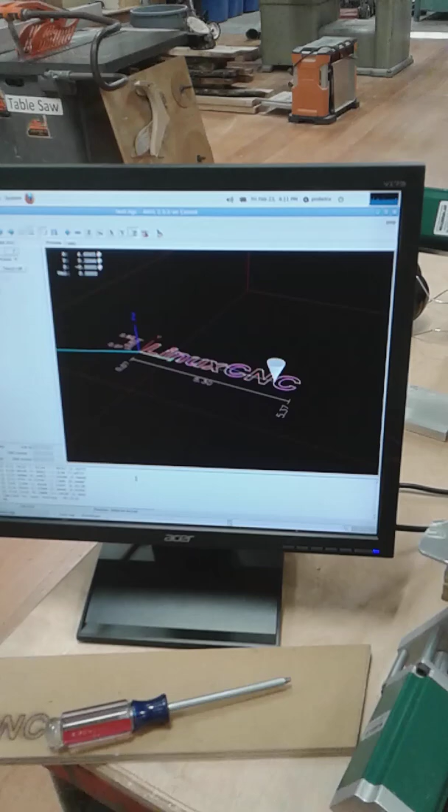Okay, here we go. It's another mad day in the DSS wood shop.

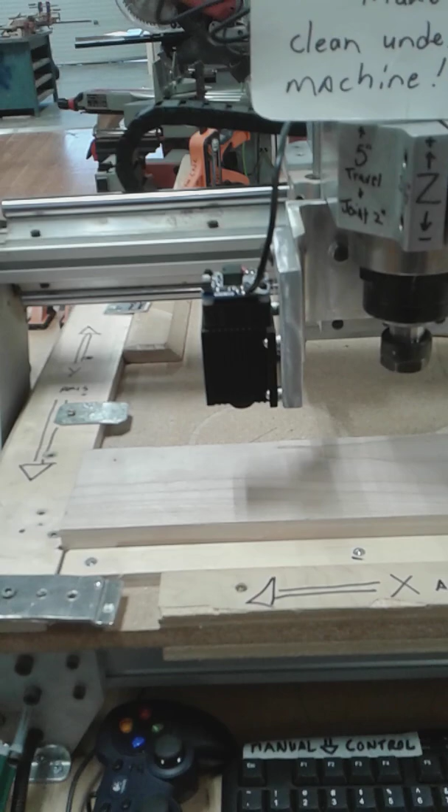We're working on our CNC router, and we bought this laser head a while back for doing some laser engraving, and I'm finally just getting around to setting it all up because we have to write some custom G-code for our post processor, since it's plugged into where the spindle goes, back there. So the spindle will shut on and off to turn the laser on and off while it's traveling between what it's engraving.

So let me just really quick, there it is, and there's our test file, and this is a Linux CNC test file that the machine came with.

I've done a bunch of manual editing of the code, and it may not be totally clear, but M3 is to start the spindle. We had to have a pause, a G04, a half-second pause for the laser, and then M5 just shuts it off. So I went through this file and manually edited that code, and then spat it into the program.

And set my zeros, and it's actually working really well. So I've got a test piece, I got the laser, and there's a piece I just ran, so I'm going to run that right now.

I've got my special 140 to 600 nm glasses on to filter out the laser light that's bouncing off the wood. And we got this clamped down just so the wood doesn't move with vibrating the table. And here we go. There's the play button, and let's see what happens.

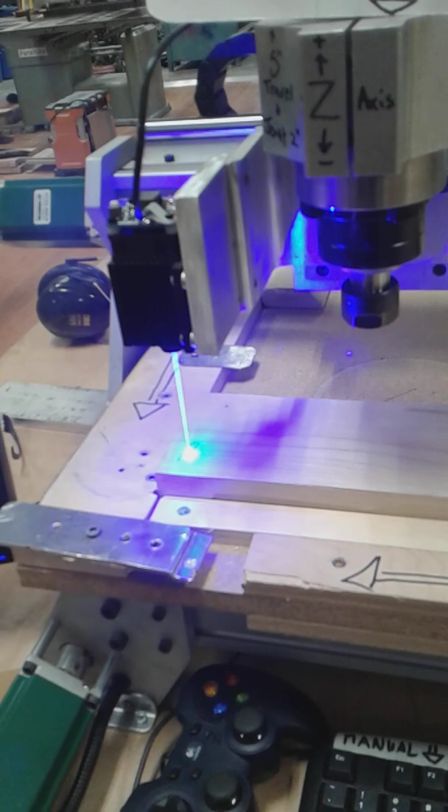Fascinating to me that the video is actually picking up the raw laser light, but again, the glasses that I have on are filtering that out, so all I can see is what's actually occurring on the wood. And there's the program kind of bouncing through the G-code.

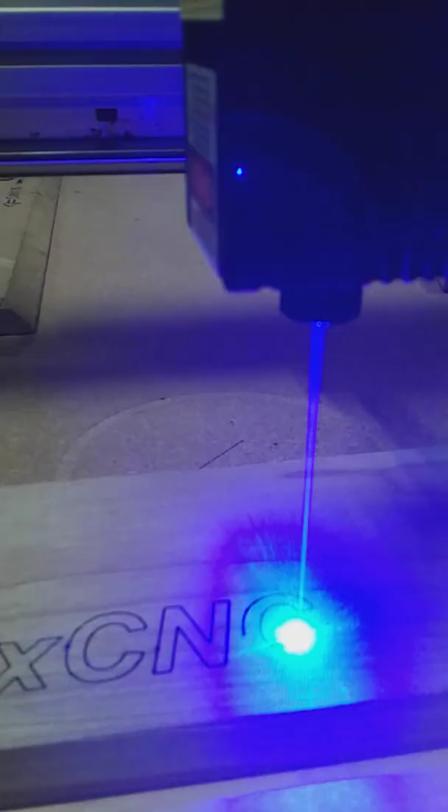And there we go. So it burned the Linux CNC logo into the wood, and it did a really nice job. And actually, if we zoom in, let's see here, can we zoom in right on one of the letters? Oh, that's a little too close.

But there actually is a depth. It actually goes down, we were using pine, it was going down about almost a 1/60th of an inch.

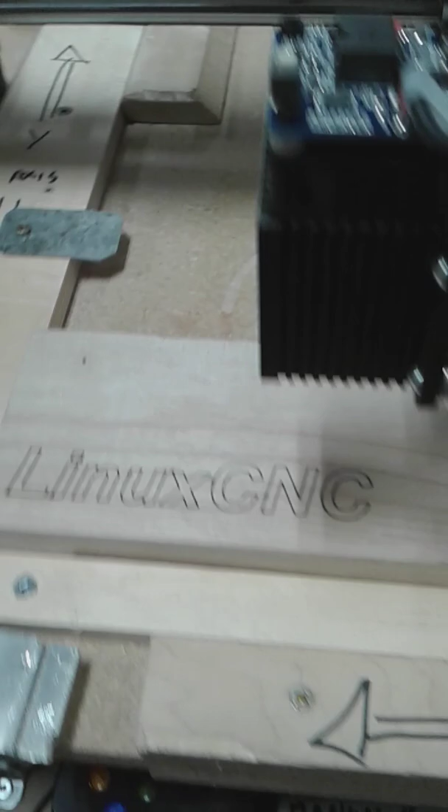So there we go. So there's some fun with lasers, and if you actually wanted to do something really large, you'd have to have a really large machine to do it in, so a retrofit to a router seems like a great way to go. We're going to keep playing around with this, and we will be back.